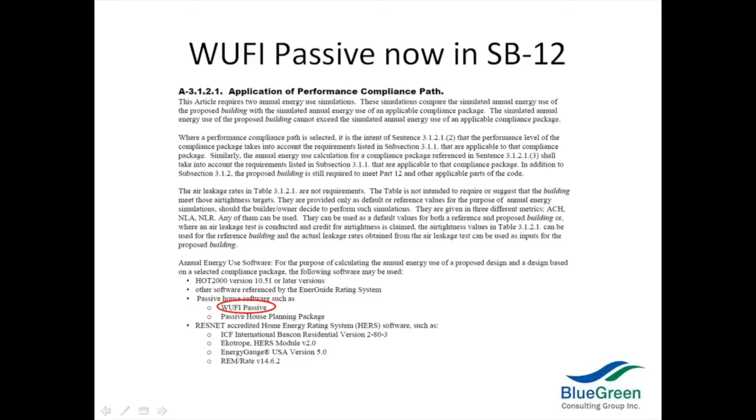So now there might be some confusion between WUFI Plus and WUFI Passive. It's virtually the same software. It's just that WUFI Passive tells you how far you are from the Passive House standard or whether you have achieved it or not. But other than that, it's essentially the same software. It's a dynamic, and I will come back to explain what dynamic here means, dynamic whole building simulation model. And the important part of that is it allows us to simulate the indoor climate. And again, there was this question about overheating. The indoor climate has a lot of other factors playing a role, rather than just heat gain. And I'm going to get to that.

But again, if we are able to simulate it, to me that's a huge leap, because most of the complaints that architects and builders face is discomfort. It's getting too hot here. It's too cold. So if we are able to simulate that, we can address it, and I think that's a very good way of addressing problems that might come up in 2 years or even in 10 years, because we can also do a hygrothermal analysis, which is about seeing whether there will be any moisture accumulation within a wall. Again, we are building thick walls, and sometimes we're building walls that have hygroscopic materials like cellulose in them. And sometimes we want to know what's going to happen based on the climate we have built the house in.

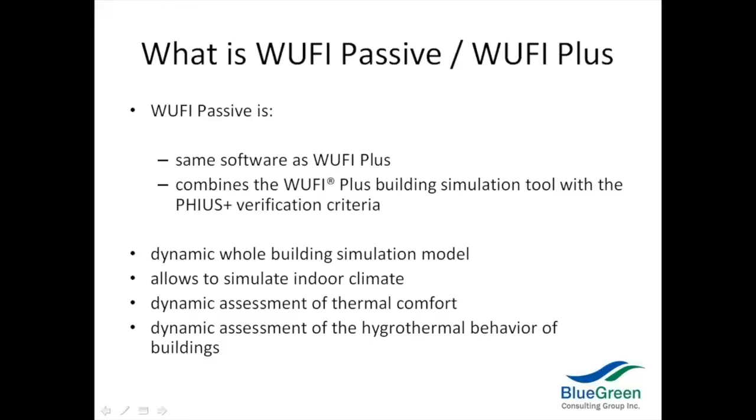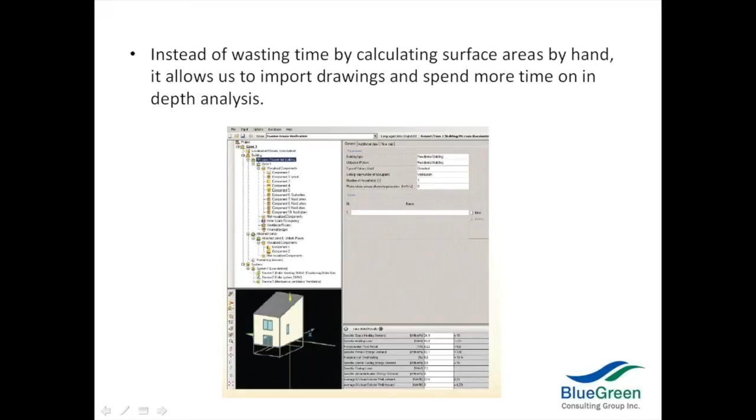So now, the other good part is that we can import drawings, so we can spend less time on calculating surface areas, and more time on analysis and really the stuff that an energy simulation software allows us to do. So with the energy balance, that's the monthly heat loss, heat gain calculation. That's a simple calculation again. However, there we can also model the thermal bridges and analyze them more, because those thermal bridges are really the stuff that takes away from that high performance wall. And most of the time we don't have any sense what the effect is. And knowing the effect of a thermal bridge allows us to further optimize it.

Now, simulating indoor climate. What are the factors? And again, it's a dynamic calculation. A dynamic calculation means that you take into account dynamic loads, say, solar heat gain. It's an hour-by-hour calculation, as opposed to other software that use monthly average climate data and calculate with that. So it will allow us to say where in the house, at what time, overheating may occur. And I think that's a great way of looking at the house, because, again, we're trying to eliminate complaints.

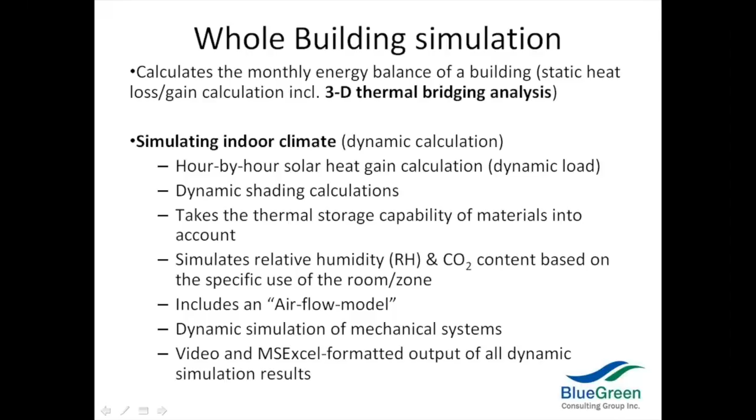And also simulating the mechanical system and the response to the overheating or the issues that might come up hour by hour in the house. So we can tune in the mechanical system, or see what other elegant ways there are to counteract the issue of comfort there. Also, you get a video output of all dynamic simulations.

In our climate, now I want to talk about the hygrothermal calculation and talk about durability and risk. I mentioned that we want to build high-performance houses. High-performance houses have thick walls. And also we want to use materials that are benign, recycled. Cellulose is one of those. We can't do everything right, but we are looking into the moisture migration into a wall if something goes wrong. And based on the specific climate of that area where the house is, we can then see whether we're running a risk or not.

This simulation calculates the moisture accumulation over 10 years or 15 years, so we can assess whether the little bit of moisture that accumulates into the wall over the years can pose any problems down the road. For example, a double stud wall has a very cold outer surface, and that might be a risk or might not be a risk. We don't know. Up until now, we handled these issues according to OBC, and regardless where we're building, there was just one formula that allowed us to see whether we're at risk of moisture accumulation or not.

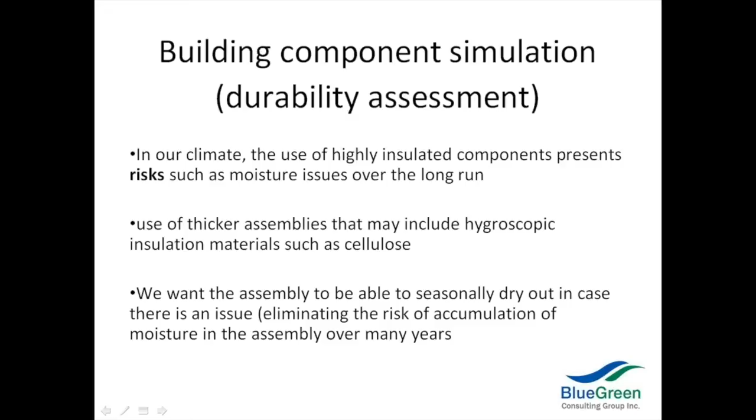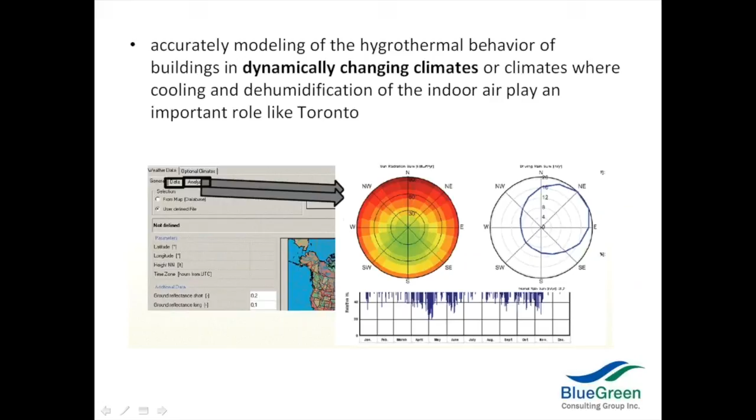Now, on the other hand, we have a dynamic changing climate outside, and that really applies to Toronto. We have a super cold winter and hot, humid summer. So we got it all here. Basically, the software uses weather data that has the solar radiation in there, the driving rain factor, and also relative humidity and all the other good stuff. The software takes internal and external moisture sources into account. For example, if an assembly gets a lot of driving rain, we can do a stress test and see whether it can hold up or not.

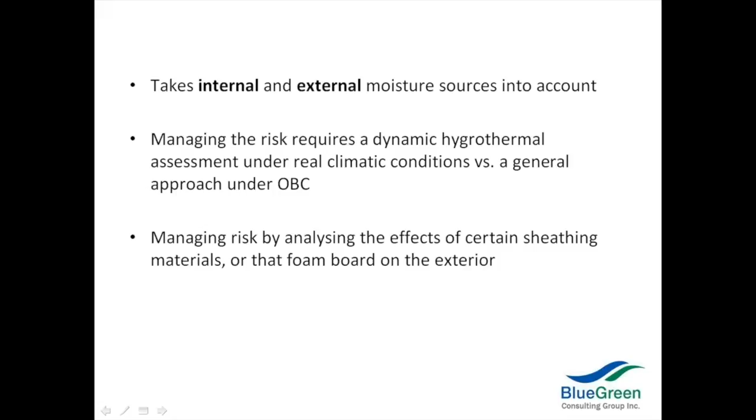Again, I talked about the sheathing of a double stud wall. Is that going to pose a problem? What if we go for OSB or plywood or zip sheathing? What are the implications? We don't know. Or that foam board on the exterior. Does that allow us to have an assembly that can dry out when something goes wrong? We don't know. However, we have all of this broad approach.

We know that the side that's exposed to the sun, there will be relatively not much risk of anything going wrong there. But what about the other side? We know maybe that the south-facing wall may dry out. But what about the wall that's not getting heated by the sun? So we can do a hygrothermal analysis to see whether we're running the risk of anything or not. We can also do a thermal bridging calculation that allows us to further optimize the envelope, stuff that we never were able to look at the way we now can.